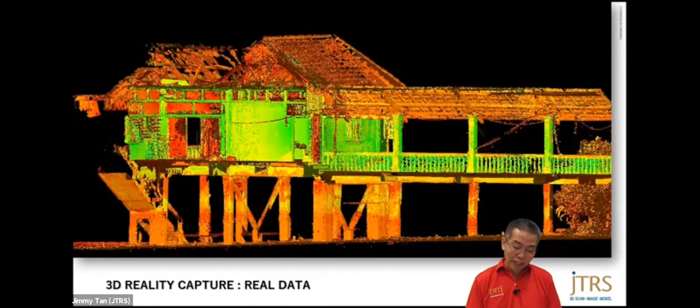For example, in these slides you see an actual site in Singapore. Facing north is Malaysia, Johor. Even at low tide, we try our best to balance ourselves in the mud to capture the structure and the building outlines, so that this is what you will see in the point cloud data. It's all drawn to reference, it's all been scaled, looking at the real world. This information can be used to develop into a 3D model later on, either in mesh model or BIM model.

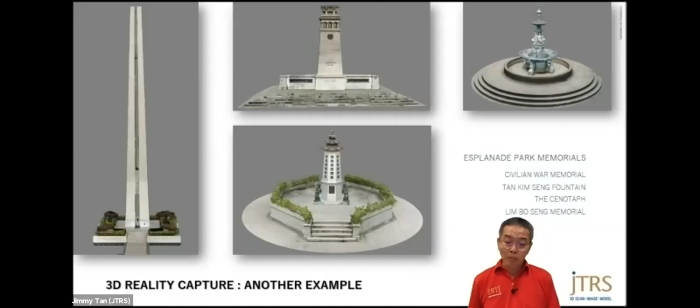Let me show you another example. This is also in Singapore, Esplanade Park Memorials. It consists of 4 monuments. Let me go straight to one of the monuments, the Tan Kim Seng Fountain. What you see here is actually a digital image, no different from any other images taken from digital cameras. However, after the scanning, what you see on the left side of the screen is actually the point clouds, and on the right-hand side is the images plus the point clouds merged together. We call it colorized point clouds.

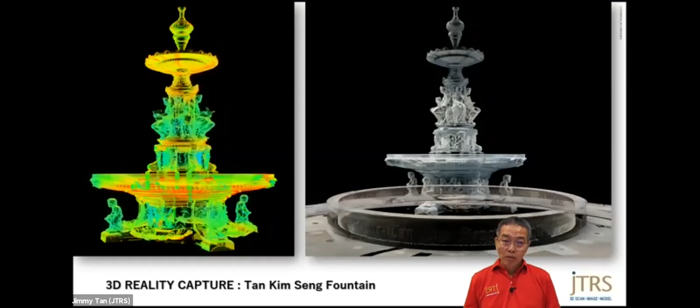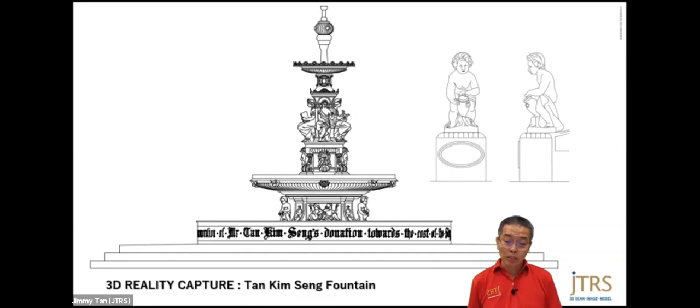From this reality capture, we are able to transform it into either a 2D drawing, as you see here - it looks like a real kind of structure, you can see the baby face looks like a real person - or we can transform it into a 3D model. In this screen you see a photogrammetry plus 3D scanning methodology. In fact, we did a scan for this monument, this fountain, using 1 mm spacing to capture the small details of the fountain.

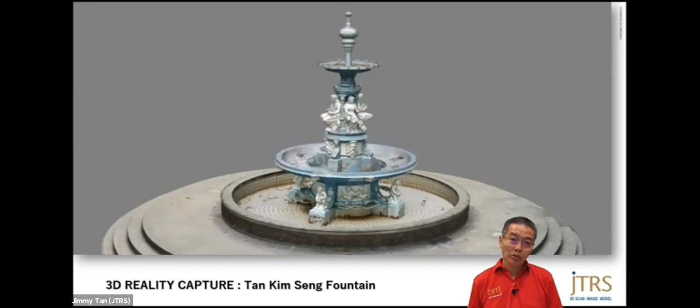Let me carry on. You may ask, what is a 3D laser scanner? For some who are not familiar in this field, they may not know what 3D laser scanning is. In short, a 3D laser scanner is a non-contact, non-destructive technology instrument. What you see here, a green line, is actually a 3D laser scan, and it captures the profile - for example, the profile of this facade - and turns it into 3D points. So this is what 3D laser scanning does.

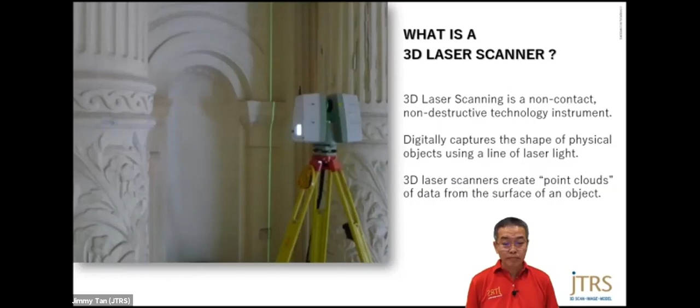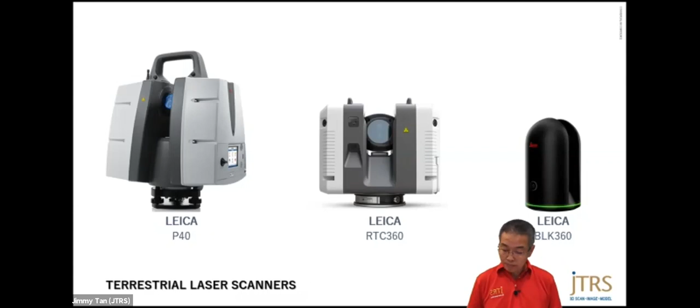Okay, I've said so much about Capture Reality and 3D laser scanning. Let's go to the project itself. Recently we just completed the scanning to BIM for Changi Airport Terminal 2.

We also scan the mechanical, electrical, and plumbing, MEP in short, above the false ceiling.

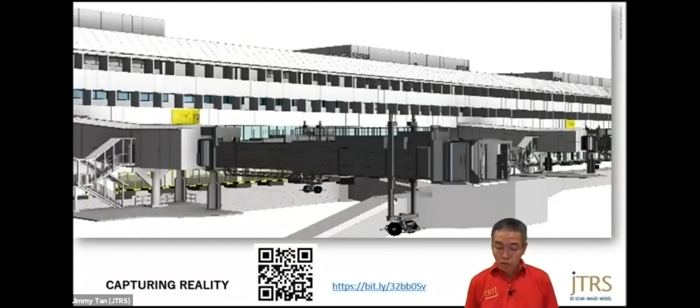If you screenshot the QR code, it will link you to an article that we wrote on this project in particular. There's more information on this project itself. Other than the scanning, we also talk about control points and so forth.

Singapore Changi Airport is famed for its calm atmosphere and smooth running of operations. Its long-standing reputation as the world-leading airport can be largely attributed to management's progressive and innovative approach to running an airport. To further enhance aspects of facilities management on an ongoing basis, an accurate and precise 3D model capturing every aspect of the terminal's architecture, structure, and MEP is required.

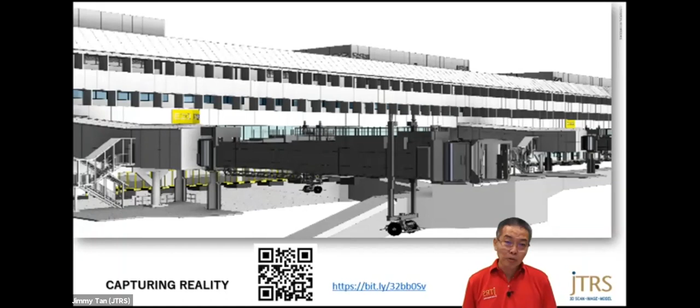Let's go to more details. I was showing a lot of slides captured on site. So here are a few of what is.

Although this presentation is titled Capture Reality in Singapore Changi Airport, the workflow, the equipment used, and the software we use can also be applied to other projects, small or big.

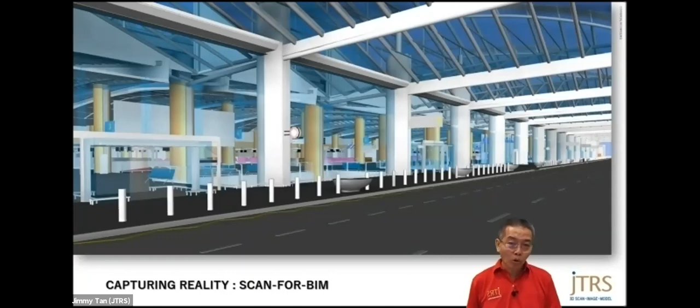Because a lot of old buildings don't have existing drawings, and even if we have existing drawings, they may not be accurate. So the best way is to capture them in terms of 3D scanning, and then we have a 2D drawing or 3D model.

There are a lot of advantages to having a highly accurate BIM model. This information can be used for future A&A works, such as to check any clashes during the design stage. Also, the data is always up to date and all in a digital platform.

Scanning the entire building accurately and building the BIM model can actually help FM in managing the building. For example, the type of lighting installed in the ceiling, when it was made, or where it was made, and when it was last replaced or changed.

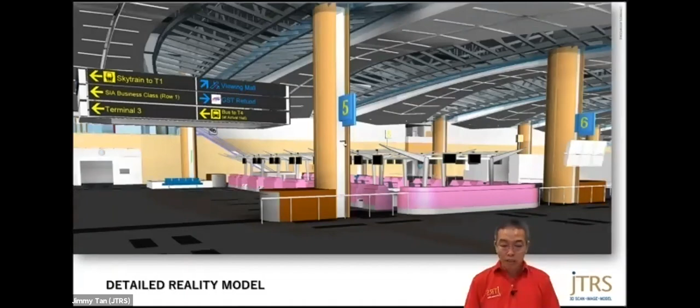When doing the BIM model, the question will be asked: what is the level of detail? When a designer designs a new building, the level of detail can go as high as LOD 500, or the highest level in construction.

But in an existing building, it may not be practical to have a high level of detail, because the higher the level of detail, the more costly it is. And if, let's say, the attribute data is not available because the equipment or material has been installed 20 or 30 years ago, such missing information may make the BIM model useless. Because in a BIM, we need all this attribute data to help manage the entire building.

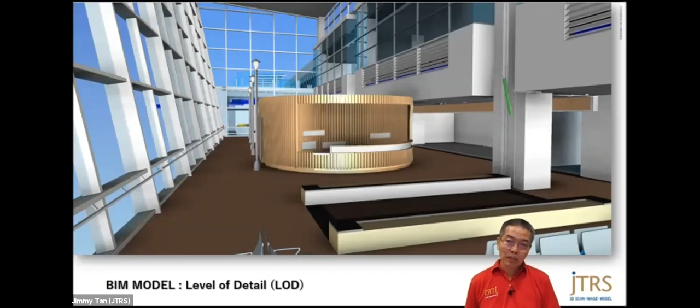Okay, let us go through the equipment list. Not so much a list of all the scanners, but the equipment that we use. This is the workflow that we do.

On the left, we have the Leica P40. On the right, we have a BLK 360. These two are the scanners, one big and one small. The one in the middle is actually a 360 degree panoramic camera that works together with the P40. Although the P40 has internal cameras, in terms of workflow it's a bit slower and lower resolution than the iStar.

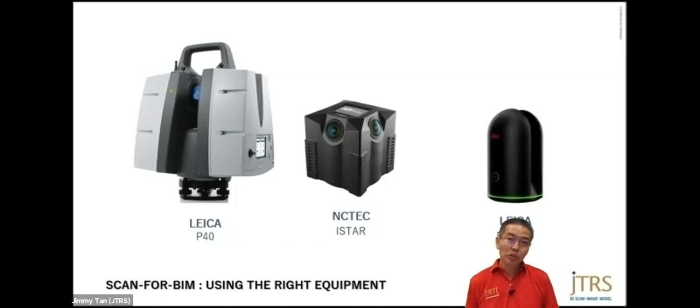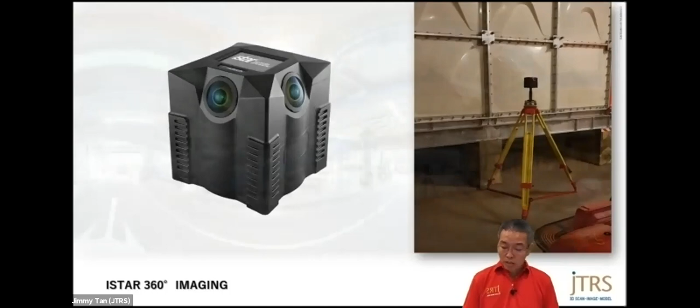Okay, this is the image of the site actually taken with iStar cameras. It's a 360-degree panoramic image. And what you see right in the center is actually a scanner. So we have actually two tripods. One is the scanners, and one at the back is the cameras.

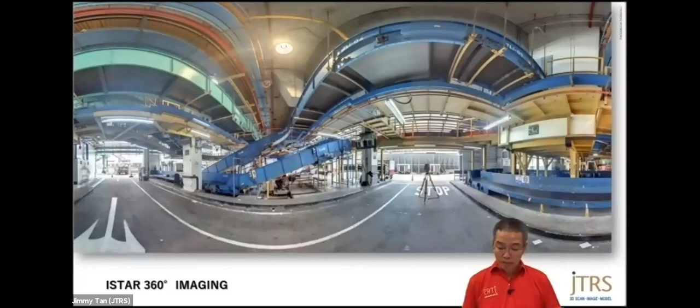Let me share some of the images, some of the screenshots actually that were taken on site. This is actually the actual site, the Terminal 2 arrival hall, I think. Yep. So you see the colors. It looks like a digital image from a digital camera. But in fact, this image is actually point clouds with images. Meaning to say, you click any part of it, the ceiling and the floor, you have a distance. You want to measure the length of the table, for example, you get the dimension.

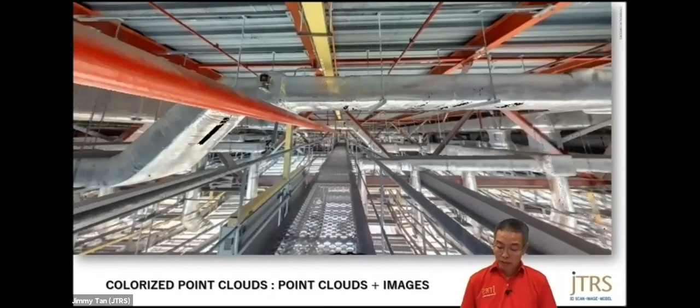Another example, this is also part of the building in the roof. And you can see it's well lit up and well colored. As we know, Changi Airport is a very busy operational airport. You can see here, for example, at Terminal 2 departure hall. All right, you see a lot of people checking out, checking in to board a plane.

And the airport cannot stop operation just for us to do the scanning. And in fact, when we're doing the scanning at the baggage system, the conveyor belts are still running. And you can see the luggage actually moving very fast on the conveyor belts passing us. So we need to map out the whole entire terminals, interior, exterior, even inside the toilets and above ceilings, while the airport is still operational.

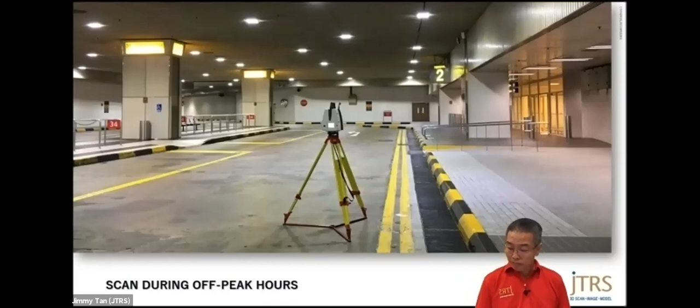So the only way to do this is scan or survey during the off-peak periods, off-peak hours. Hours like the last bus leaving the terminal, like the last plane flying out, or the last plane landing. So after that, there will be a period where there are fewer passengers and we can start our scanning. So we have a lot of planning and a lot of replanning and rescheduling of the work we carry out. In fact, in the plant room like this, we need to apply for a permit to work, even on the rooftop.

You realize that in all my slides, you see tripods, wooden tripods, all right? We don't use aluminum tripods for one reason, because wooden tripods are more stable and able to absorb heat and vibration very well, especially when we have heavy scanners on top. Okay, what about above ceiling? This is one site where, yeah, you have above ceiling, but you have a catwalk to walk. So you have space to walk around.

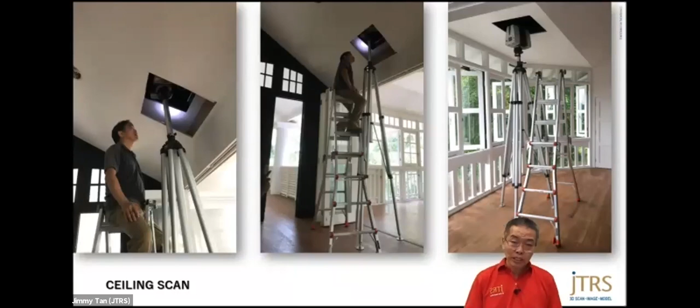How do we do it when there is no space? Let me pause for a while for you to look at these images. You realize that we use big tripods, bigger than traditional tripods. We also use a heavy duty ladder for us to climb up and mount the scanners on top. Well, those were the days, because for this you probably need a big lorry or van to carry the tripods and the ladders. But those were the days, because we have this.

We have the BLK360, which is small, light, and fast. And we just mount it on a light or spacer stand. And then we move around with a dolly. You can see that there's a dolly at the bottom. So we can actually push it around easily. You don't have to carry it. And at the same time, we also mounted some lights so that you can shine into the space above the ceiling, which most of the time is in total darkness. Of course, with the current new Leica RTC, you actually can use that to do the job.

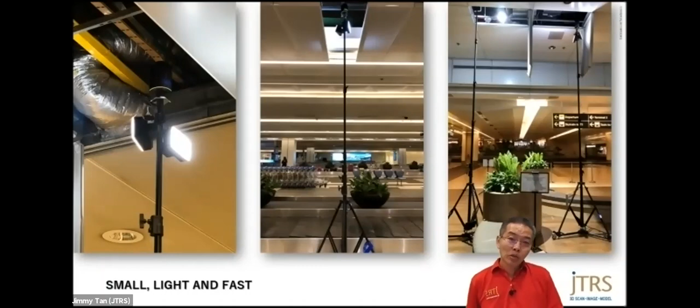So you may ask, such a big area, we have more than 23,000 setups. Meaning to say, you set up the tripod, you put the scanner on top, you start scanning. This is one setup. So we did it 23,328 times. But how do we stitch together or join all these scans? Well, some practices use targets on the wall. Some use spheres. But we only have tripods with scanners. We only have a 2-man scanning team, 1 team. We don't place targets. We don't use spheres. We don't even use another survey team to pick up the targets using total stations.

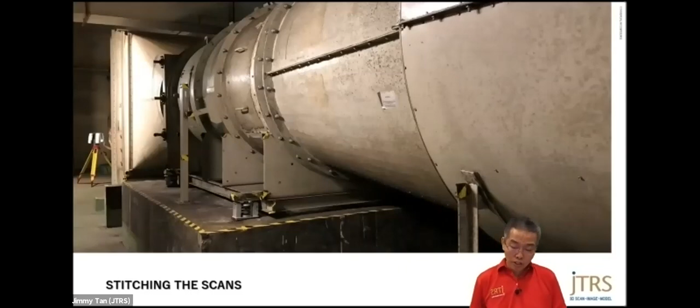All we have is this, Leica Cyclone Register. With so many setups, we use a feature in Cyclone Register called the visual alignment method. With this method, we cut manpower, we cut placing of targets, in case you forget to bring down the targets after the survey. The police officers in the airport will go after you. So we use this method to align the whole entire set of scans.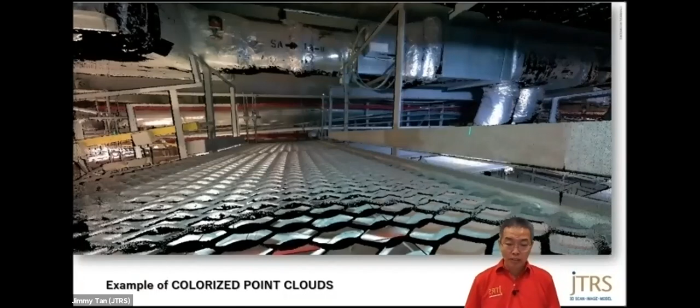Okay, so much for the examples. Now let's look at another example of point clouds and a BIM model. What you see here is actually colorized point clouds in ReCap. And what you see now is the BIM model developed based on the point clouds. Let me go back again. Can you spot any difference? Yeah, probably there's a human being there, but now without the human being.

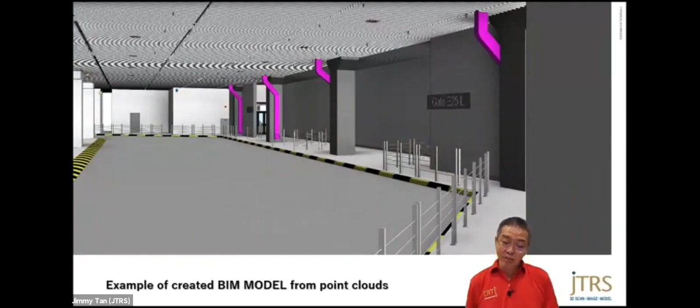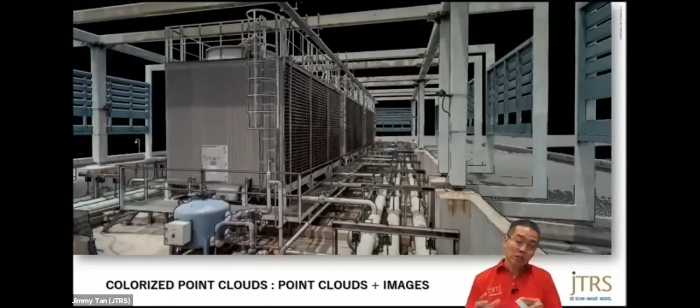And this is also another aircon equipment on top of the roof. Although it's a screenshot, it's not a single data. It's actually a merge of all the scans together to become a model, and this screenshot is just a single screenshot from there. And this is the model.

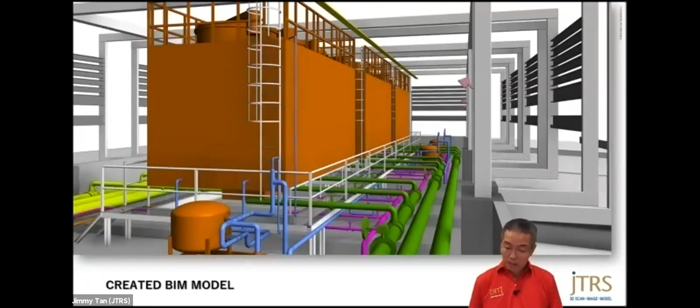It all depends on the project requirement. What I mean is the level of detail. For this case, you realize that the level of detail is not that high because it's more important to have the physical objects showing they're there rather than more detail, unless required. And of course, the color.

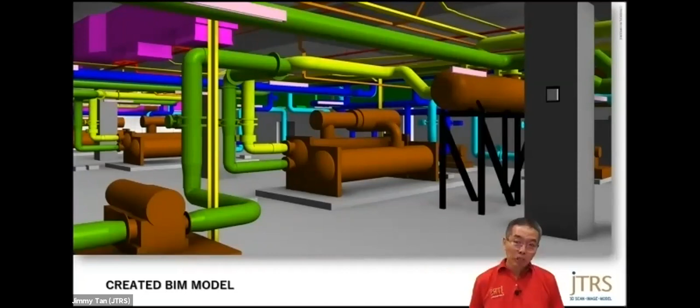The color of the model is also very, very critical because each color actually represents a unique ID for the owner or for the system. So the system owners, looking through the model, know what purpose this color represents. This purpose is air conditioning, for example, and so forth.

So we have to work very, very closely with system owners to understand each other, what the requirement is and how we can produce the best solution for them, the best model for them.

Okay, almost coming to the end. Take a few seconds to look at this screenshot of the Terminal 2 departure hall. Why I ask you to take a look is because this is going to be history in a year or two, because Terminal 2 is going for a major facelift and this is going to change starting this year.

Well, our effort to scan the entire building and also to model it accurately has paid off. The data and the model have been used for designing and constructing the new interior. What I've shared with you so far, all the slides, is based on our experience in executing the projects. There might be flaws, but this is a workflow that works for us.

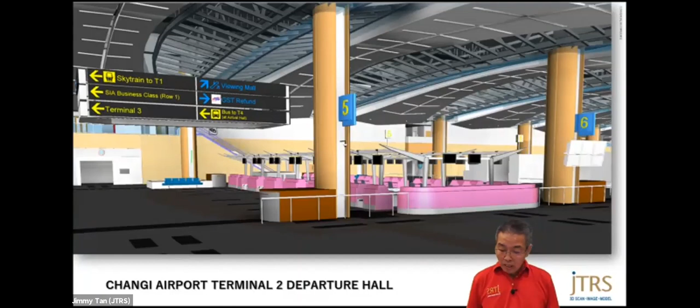I hope from this sharing of workflow and techniques, you will get some hint or idea of how we carried out this project. Likewise, you can use this for your own projects. My ending part is that as a survey researcher, I'm proud to come this far, being able to contribute our services by adopting new ways of surveying or scanning and be part of the development process for building the future.